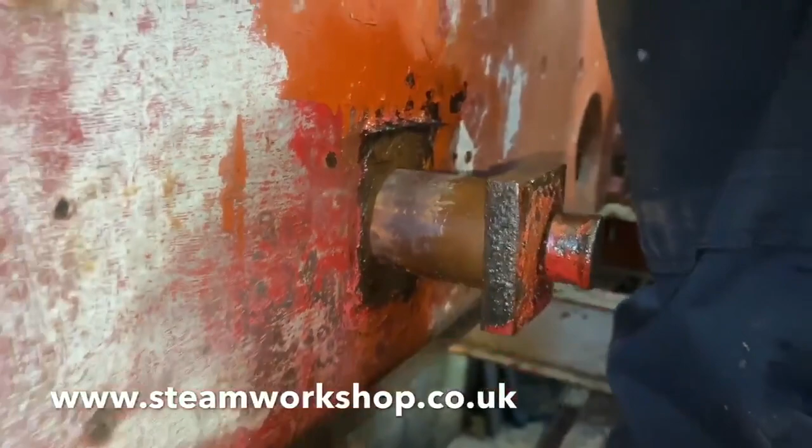Well, welcome to part 3 of the restoration of our 2-foot gauge Fowler locomotive. Here you can see we're still stripping down the frames to get them ready for shot blasting and then repair and paint.

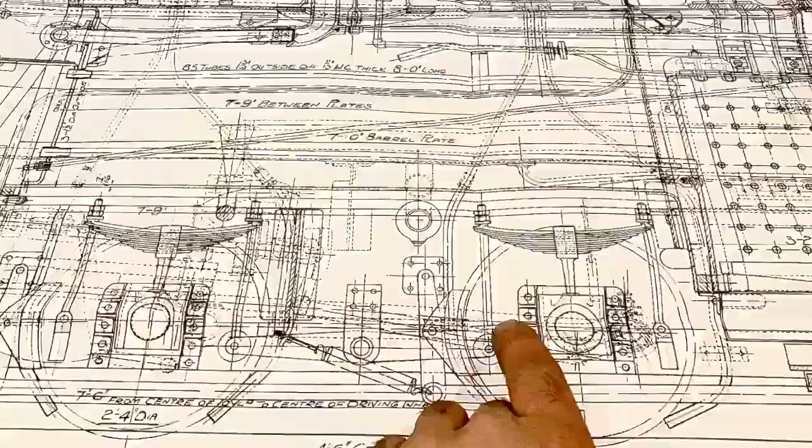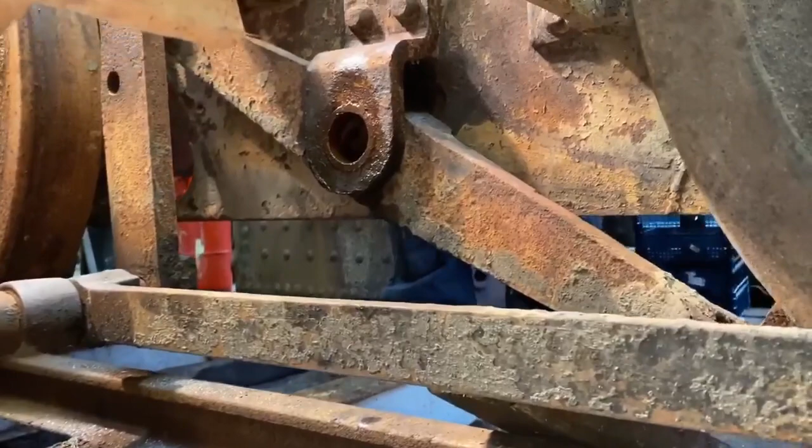This is taking out the pin from the equalising bar from the suspension. On the drawings, this is our copy of the original 1924 Fowler Works drawings for the locomotive. You can see the equalising bar along the bottom, and it takes the load up the bars through the leaf spring and down to the leading and trailing edge of the pair of driving wheels. The bar pivots on the pin you saw us remove earlier, and now you'll see the equalising bar drop to the floor, free, ready for us to take the rest of the suspension off as well.

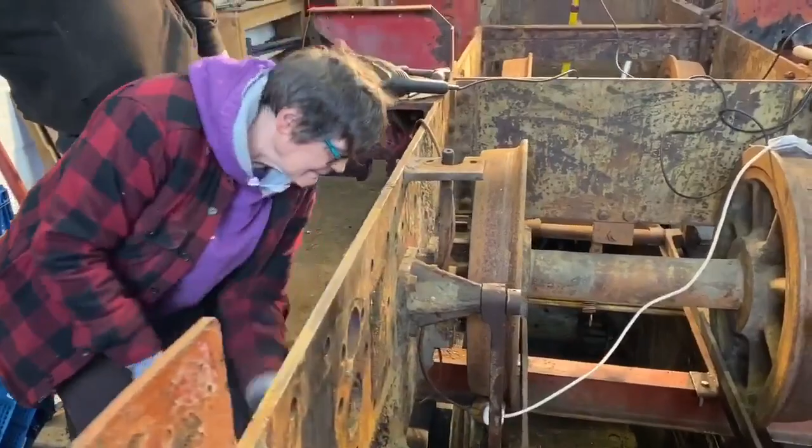Moving on to the brakes now. This is Jenny taking the bolts out of one of the brake hanger brackets. There are 4 of these, and you can see it's a casting. We're removing it from the frame so that we can shot-blast it independently.

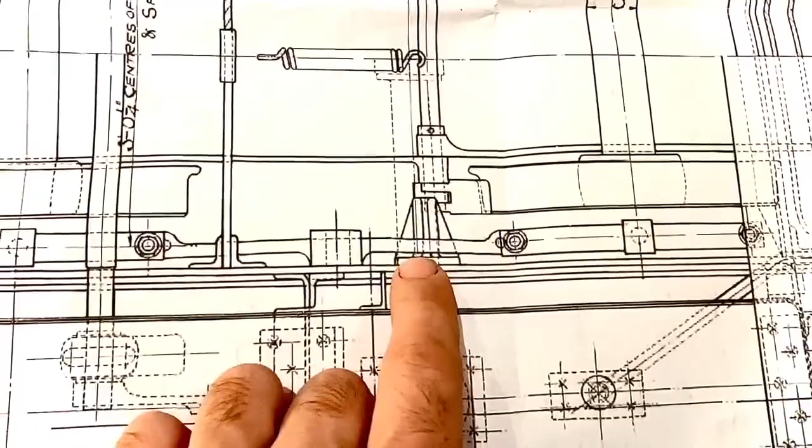You can see here on the drawings, this is the square boss that you've just seen the bolts being untightened on. There's 2 of them on this side. This is the side view, and then looking on the plan view from the top, you can clearly see the shape of the castings that we're removing. The brake hangers drop from these castings to the brake rods, which transmit the load equally to each of the 4 wheels from the cab controls.

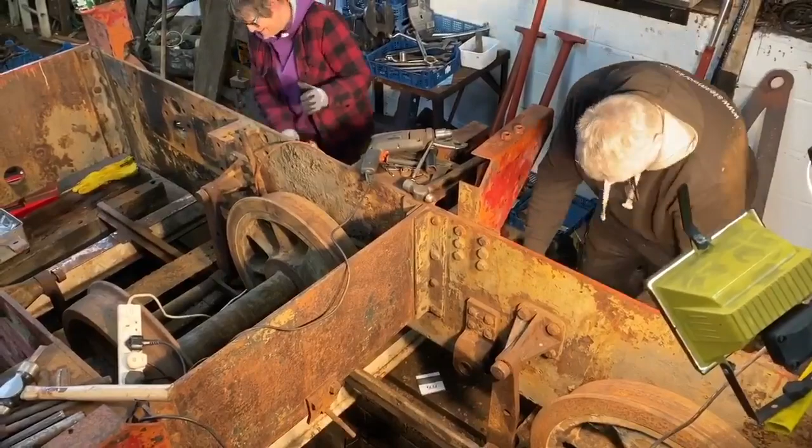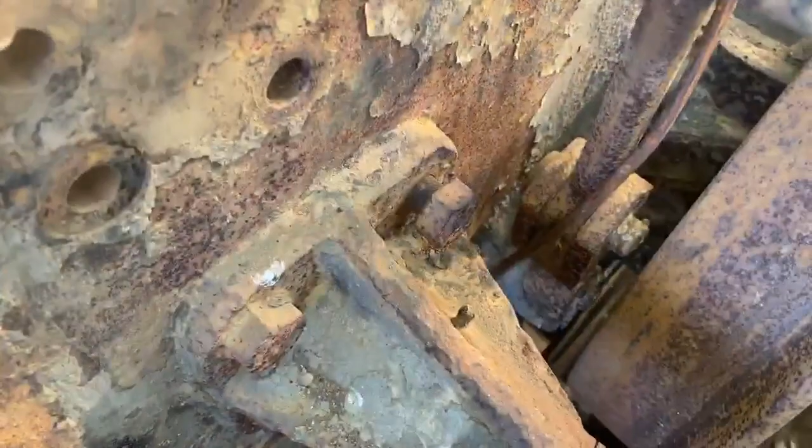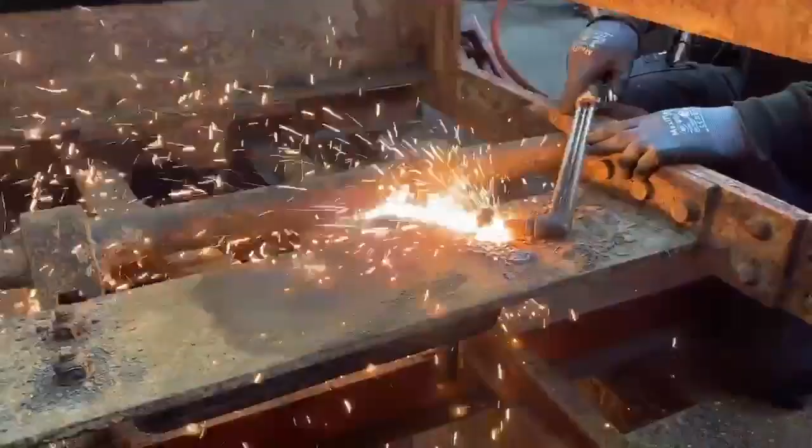Moving on to the next job, this is burning off the rusted nuts and bolts for the bracket that holds the pivot bolt for the rear pony truck.

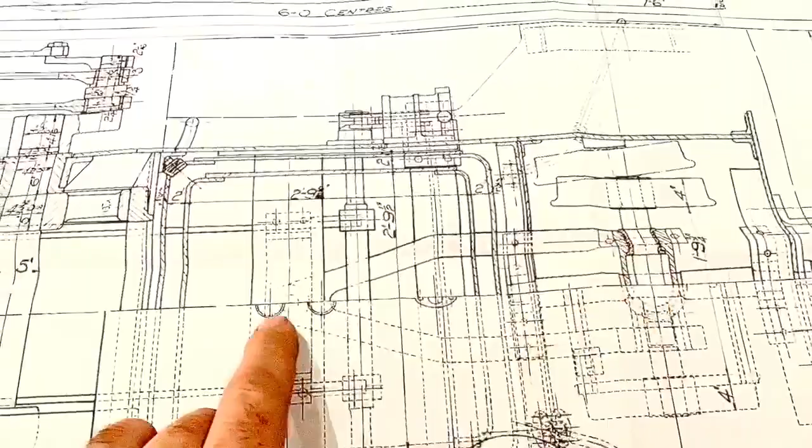Here on the drawings you can see from the side the bracket itself is a folded piece of steel, and there's a pin welded into the centre of it. Here on the plan view looking over the top you can see the A-shaped frame of the pony truck itself and the pin from the top, and this is the shape of the bracket that we took off. And here's Jenny holding it after the bolts had been removed.

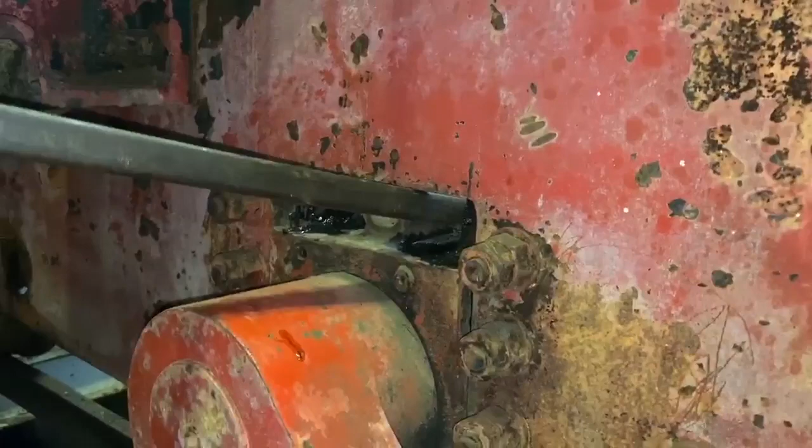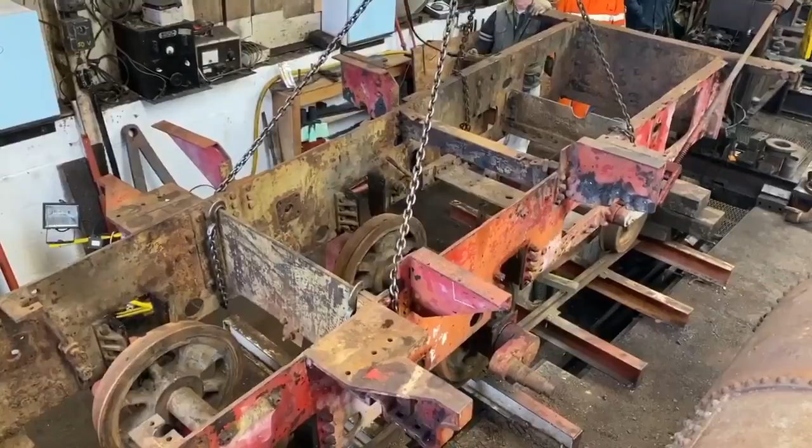Getting exciting now. The axle boxes were unfortunately stuck into the horn guides on the frame, so we lubricated everything, and you can see as we lifted it with the crane, the chain on the right hand side there around the frame. As we lifted the frame, we had to put the crowbars in on the top of the axle boxes to try and ease the axle boxes down at the same time.

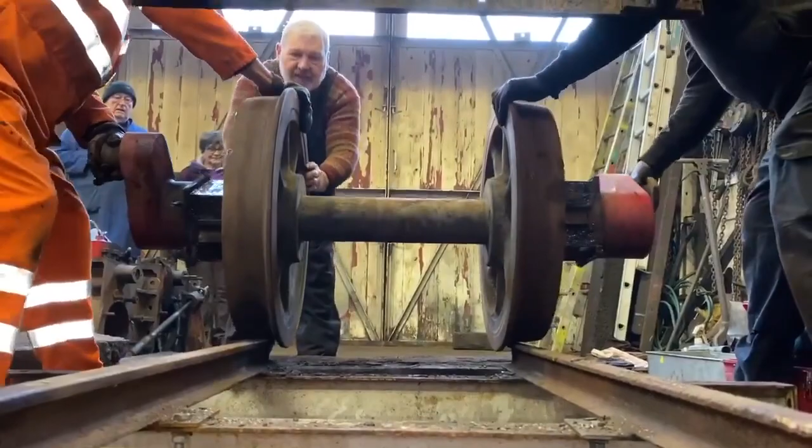The frame lifted quite easily really, and here's the leading set of driving wheels being wheeled out of the way so that we can drop the frames down onto some wood blocks to finish cleaning them before shot blasting.

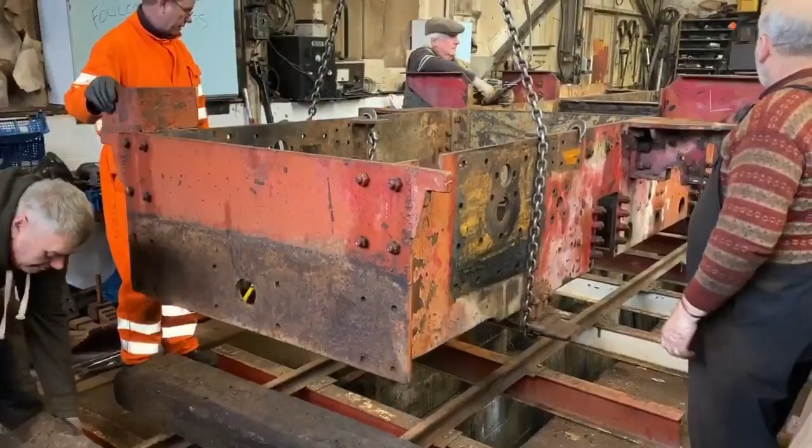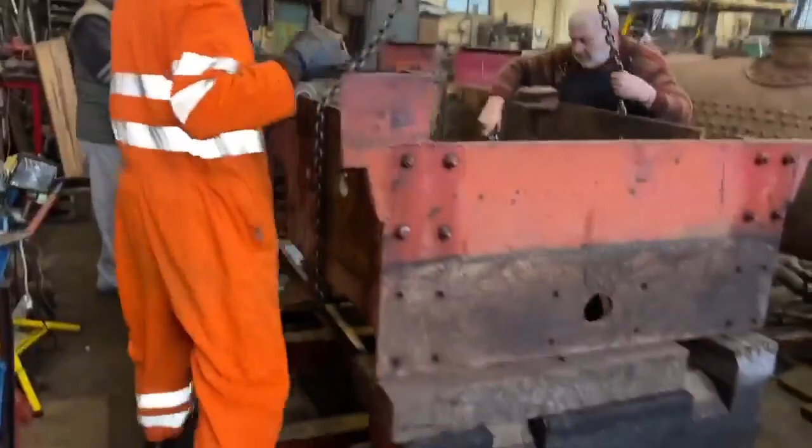Once the frames were down on the wood blocks, this is Jenny putting the horn keeps back in again to restore the structural rigidity of the frames while it's sitting supported between the 2 buffer beams.

The axle boxes themselves are split axle boxes, and here you can see we're knocking the bottom part of the axle box off, and you can see the bearing shell visible at the bottom there. When it drops to the floor you'll be able to see the shape of it.

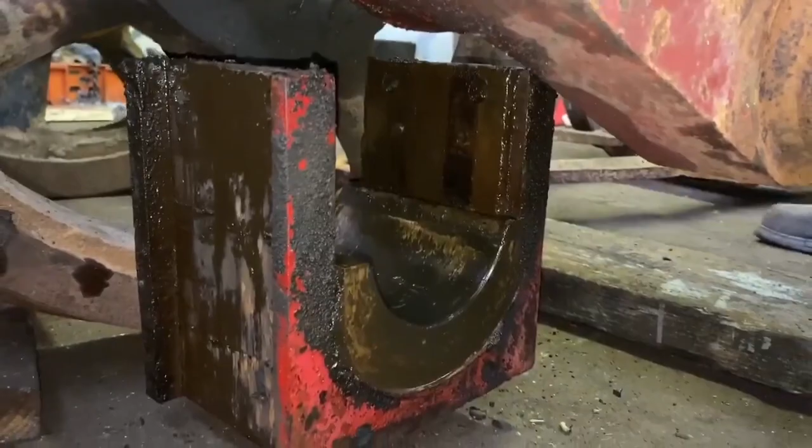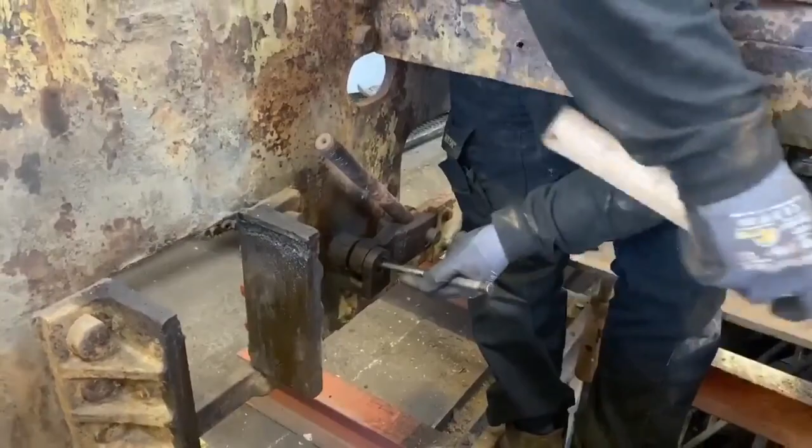Now the frames are off the driving wheels completely, you can really get in and get the last few bits off the frames. This is Jenny knocking a split pin out from the pin from the bottom of the spring hangers. These are the last bits of the suspension that we need to remove.

Here Dave's bashing the pin through from the inside of the frames out, because there's a head on the outside of the frames that sits neatly in a recess, and this is the pin coming loose from the frames.

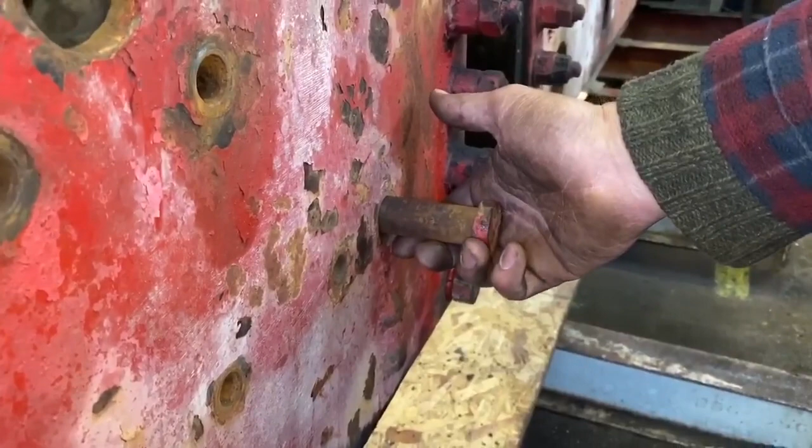The frame's pretty much ready now. We can take a temporary change of direction and look at the boiler.

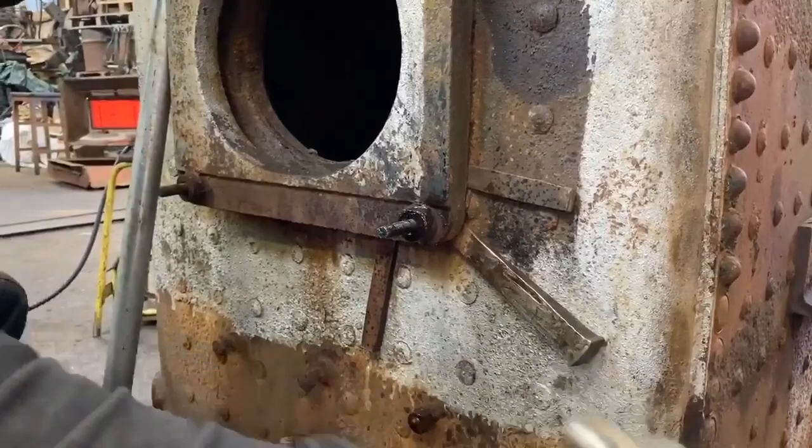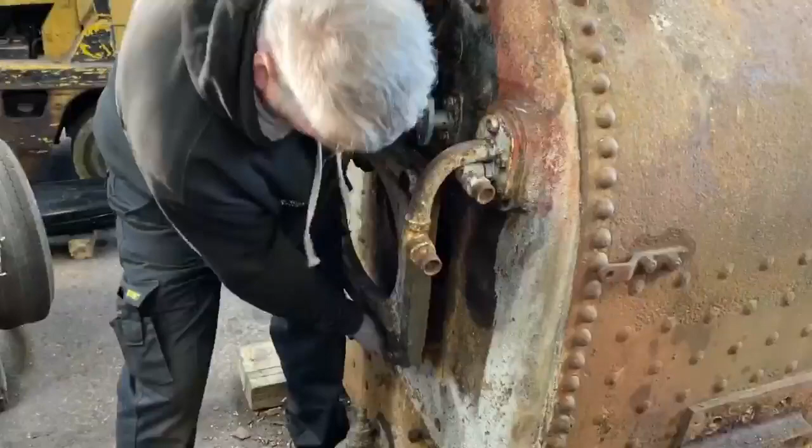This is the cast surround for the firebox door, and it was really solidly rusted and fastened onto the studs into the back head. Here you can see we're using splitting wedges to push through to try and get it away. We managed, and this is Dave finally doing the last part of removing it after a good 25-minute struggle.

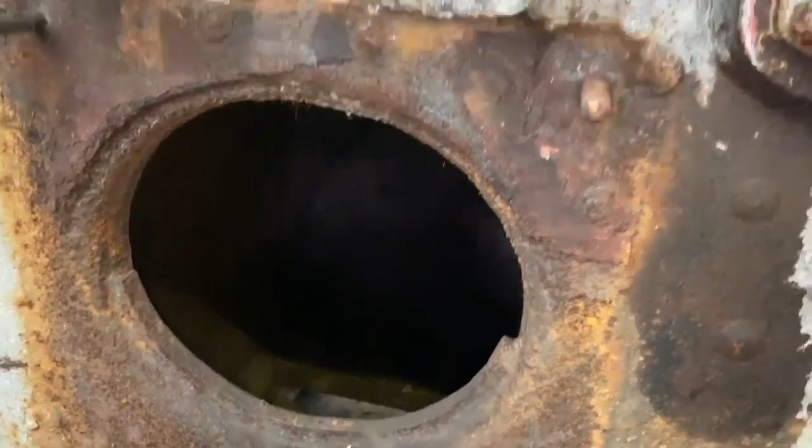Moving on to the front end, we wanted to get the smoke box off so that we could get access to the tube plate properly for the boiler inspector and for new tubes. When we looked at the smoke box, it really is a sacrificial part anyway. The plate work, as you can see, was welded here and there, and it was quite badly corroded.

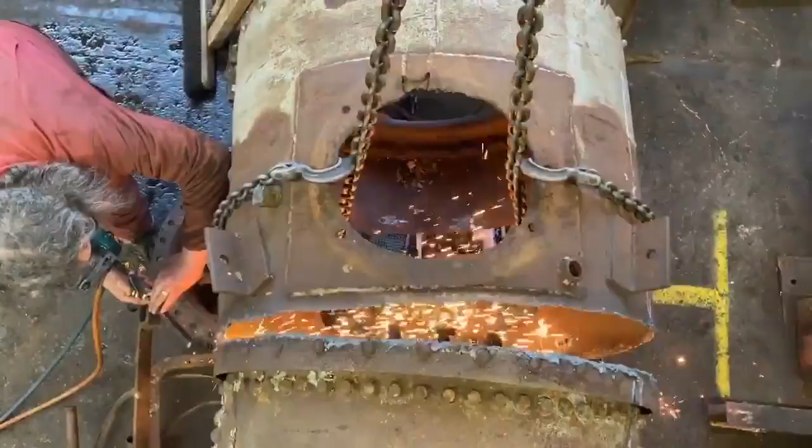So we're going to make a new smoke box. And so here you can see cutting off the original smoke box and removing it so that we've got good access to the front tube plate.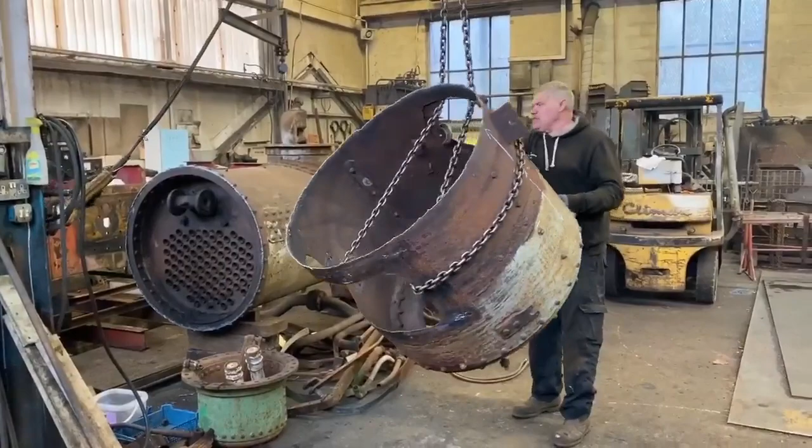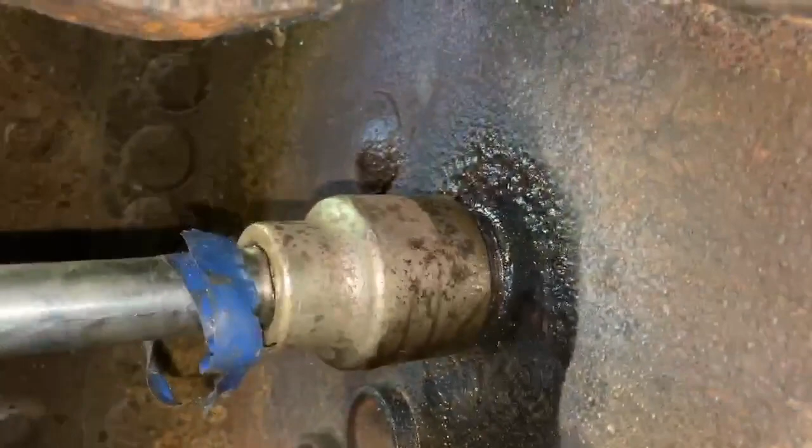It's a difficult decision to make to destroy original or old material, but we're trying to make a working, running, reliable locomotive. So whilst we've got one eye on conservation, we've also got a sensible eye, I hope, on which materials are worthy of preservation and which materials are sacrificial in essence anyway.

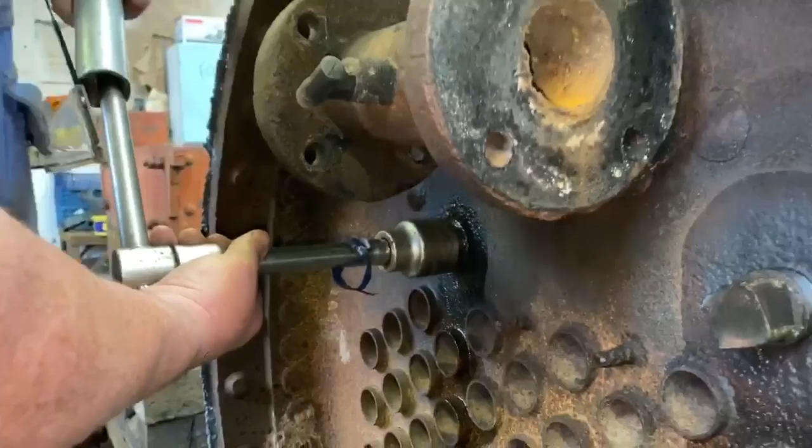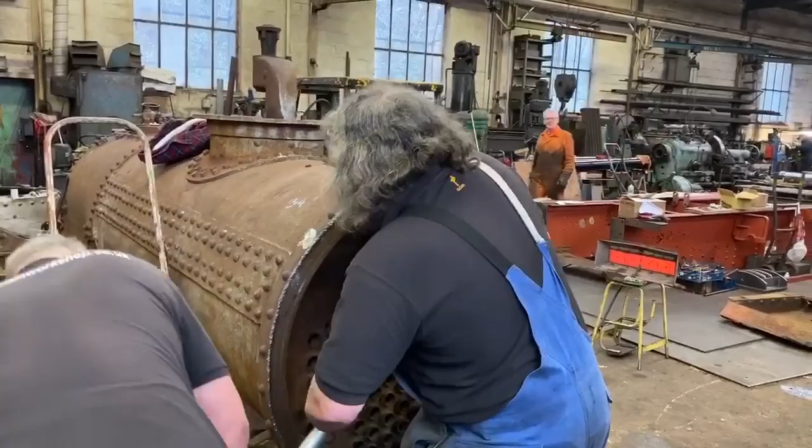This is removing the washout plugs from the tube plate. These are tapered plugs and they're gunmetal. And because they're tapered plugs, we assumed that once we got them split, they'd come out dead easily. But after heating up the tube plate with the blowtorch, really trying to get them hot and split them, and soaking them in WD-40, they fought us every step of the way.

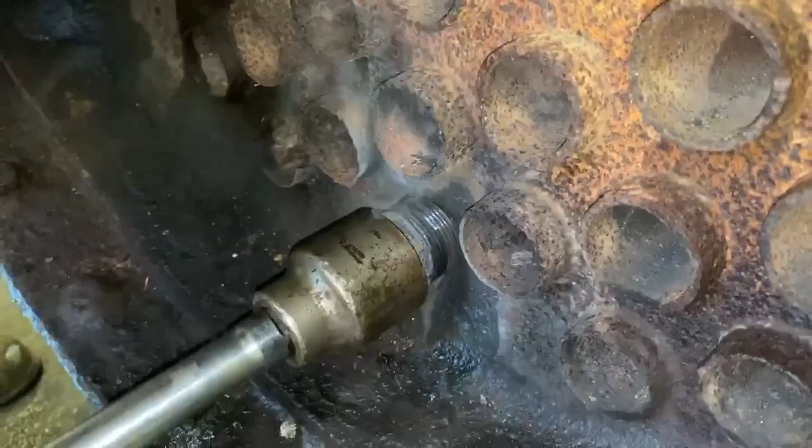Here you can see really having to hang on the end of a long bar extension handle to get them out, even with the heat. And we had to really work hard to wind them every step of the way.

But eventually we did get them out, and once quenched, because they retained quite a lot of heat from the blowtorch, we found them to be in really surprisingly good condition.

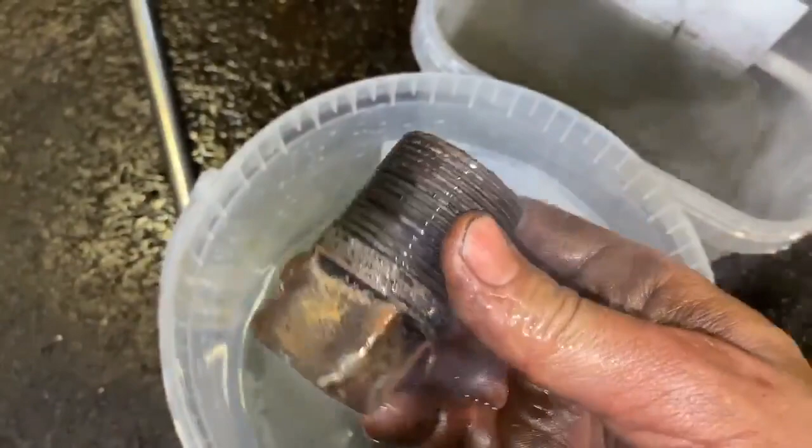Moving up to the top of the boiler now, looking into the dome, these are the two steam pipes that supply steam to the injectors. The bracket is held on by a nut which was just rusted on, so we're not destroying the nut, we're just heating it up to try and break the stiction before taking it off with a spanner.

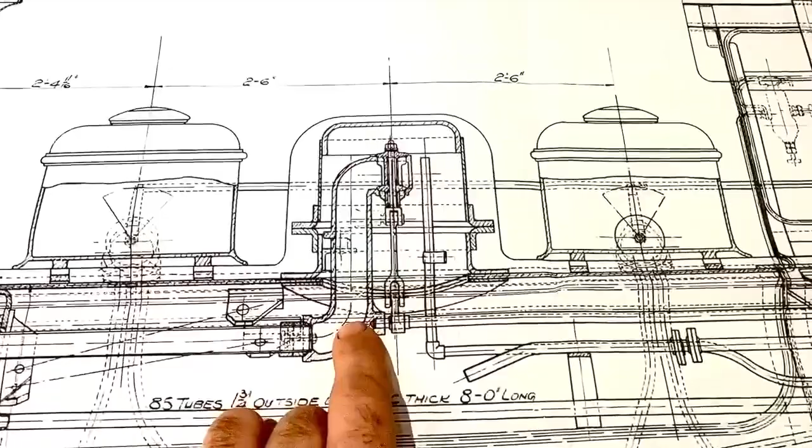Looking again at the general arrangement drawing, you can see the regulator casting in the dome, and you can see the two steam pipes for the injectors with the bracket that we removed the nut from earlier. Next we're moving on to the flange with the main steam pipe at the bottom.

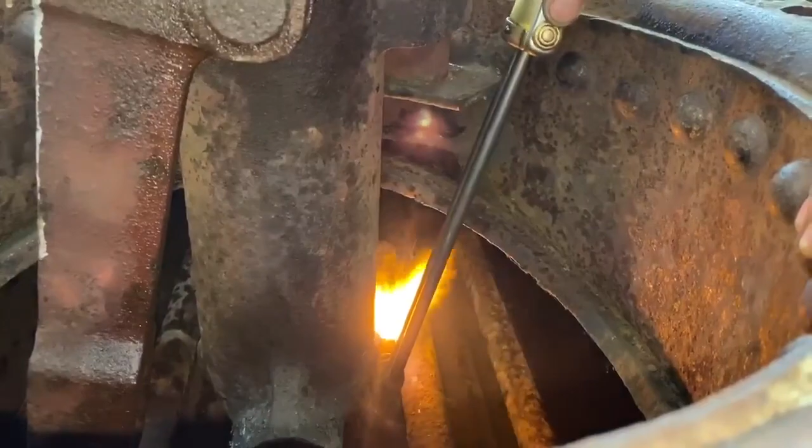The regulator casting itself is in really good condition, but the nuts and bolts were way beyond repair that fastened the casting onto the main steam pipe down the top of the barrel. Looking in from one of the holes from the inspection plugs that you saw us remove earlier, you can see that the boiler is actually in really good condition.

The tubes are remarkable. We will be scrapping the tubes and taking them out and putting brand new ones in, but as an early sign, it's really good news and an indication that the rest of the boiler might also be in quite good condition.

This is now looking in through the back head and through the regulator hole past the crown stays in the top of the firebox. And you can see the crown stays as well are really good material, so we've got our fingers crossed that the boiler will work out good. You can never count your chickens till they're hatched, but we're hopeful at this stage.

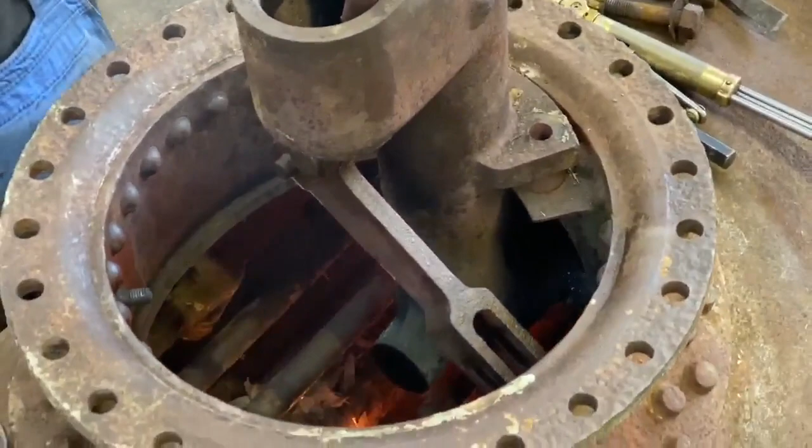Out comes the regulator casting, and that pretty much takes us to the end of part 3.